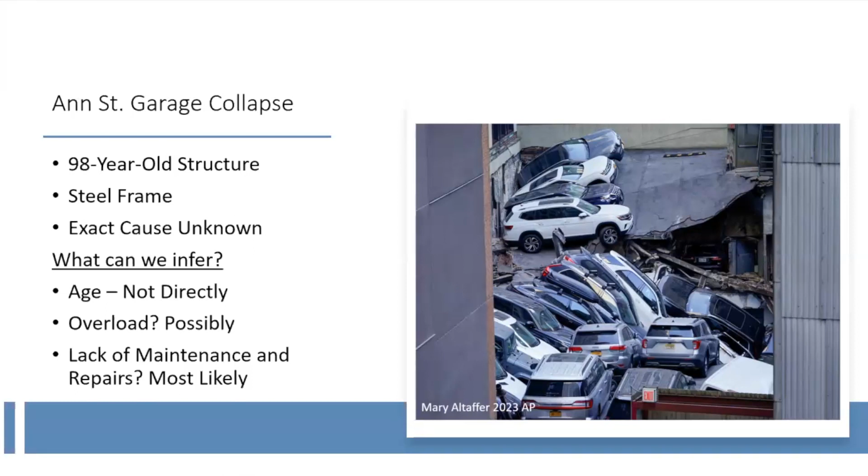Just some observations from the photos. You can see it was a steel building encased in concrete. Encased steel is difficult because the concrete hides corrosion, making it difficult to inspect. The roof also had an asphalt overlay and a buried membrane, which we'll talk more about.

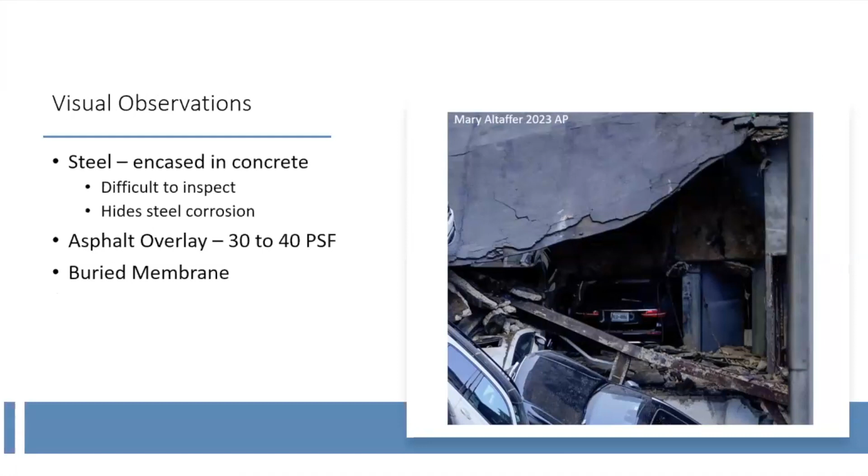In terms of what we do as structural engineers, you may have questions about what structural engineering is, but at the core, the job is basically to design the structure to support the load safely. There's one equation we use that's the basis of everything: the strength of the structure has to be greater than the load imposed. In terms of strength, there are a few things that go into it: the strength of materials, the design, and the quality of the construction.

On that side, there is variance in each of those things, so we use safety factors to account for them because we want the strength to well exceed the imposed load. For load, you basically have three factors: the dead load, which is the self-weight of the structure - all the steel, concrete, and things permanently affixed to the building; the live load, in this case vehicles; and the environment - wind, snow, etc.

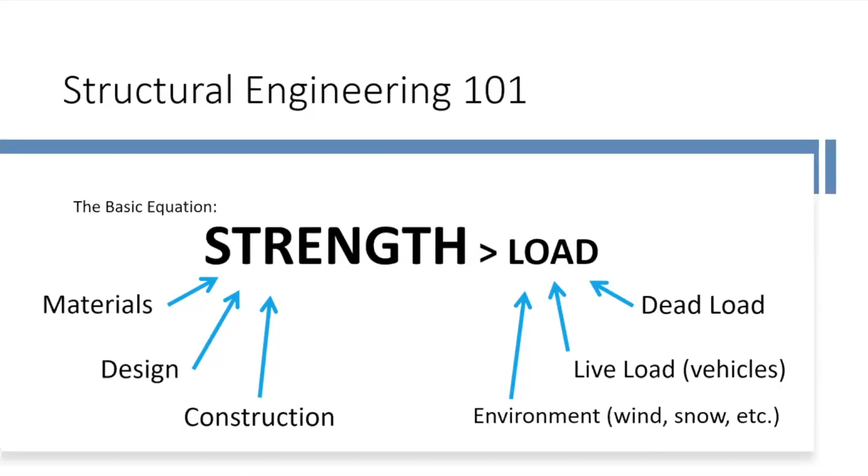So what reduces the strength of a structure? Number one, basically water. Water causes corrosion of steel - not just steel beams and girders, but the concrete slabs also have embedded steel bars called rebar. As water enters the concrete slab, that rebar can also corrode, which causes loss of strength and will also cause the concrete to spall, which we'll show you pictures of later.

What accelerates the process of corrosion is de-icing salts - the salt that the city or people spread on sidewalks and roads. Cars bring that in, along with snow and water, into the garage where it melts and infiltrates the concrete slabs. On top of that, our regular Northeast climate has a lot of freeze-thaw cycles, meaning the concrete freezes then thaws. Our Northeast climate is the worst because we have the most freeze-thaw cycles in any given year.

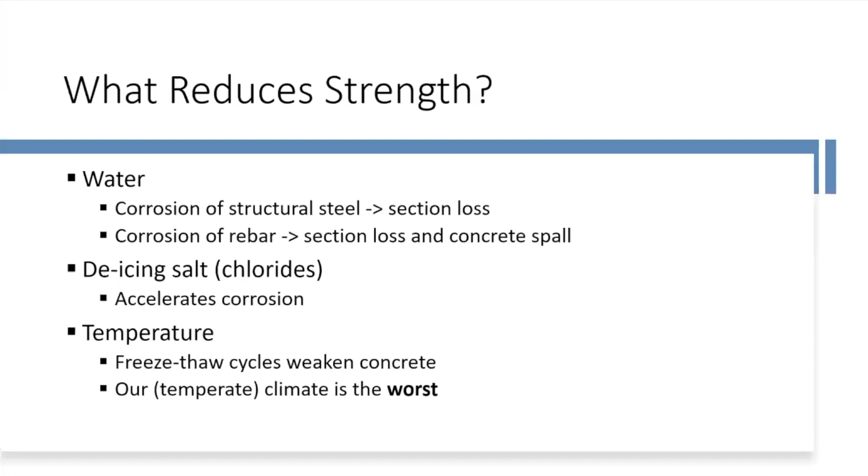Why are garages particularly at risk? Suchi will talk a little bit more about that. The big difference between garages and a building is that a building is weather tight and a garage is normally not. There are a lot of openings because sometimes these are open parking structures that bring the wind through to ensure there's enough ventilation. A lot of parking structures have windows that are broken, especially in New York City, which brings in water.

Not only that, most of the deterioration in a parking structure is related to water. Like Prabhu said, water is brought in by the vehicles that are parked there. It drops all the ice that comes with that vehicle, and it gets absorbed into the floor, causing corrosion.

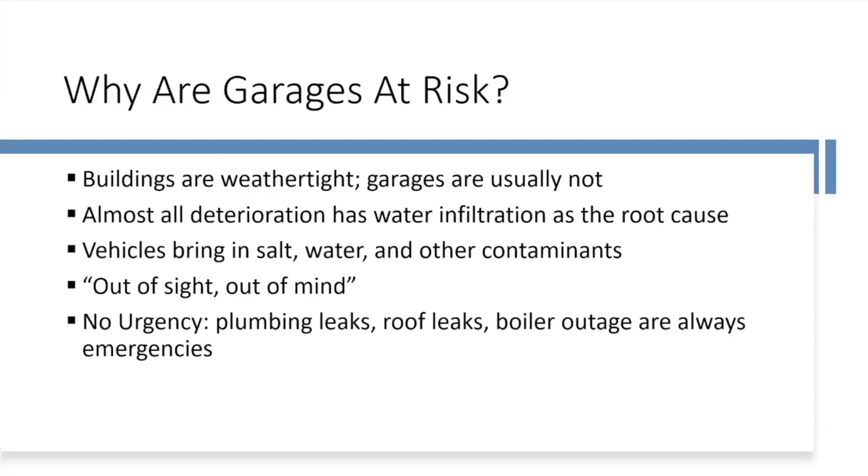So most people think out of sight, out of mind. People don't think about parking structures too much, and they don't maintain them very well. In a building, if you find a problem, you fix it right away - if water is dripping down to your room or office, they come and fix it. But in a parking garage, nobody really pays too much attention unless it becomes a big problem.

So we see a lot of steel corrosion. This Ann Street garage is a steel parking structure. If you can see some of the images, the top left one is where the column completely dropped, corroded and gave way, and the slab fell about 4 inches. On the other pictures, you can see corrosion of the beams that are really bad.

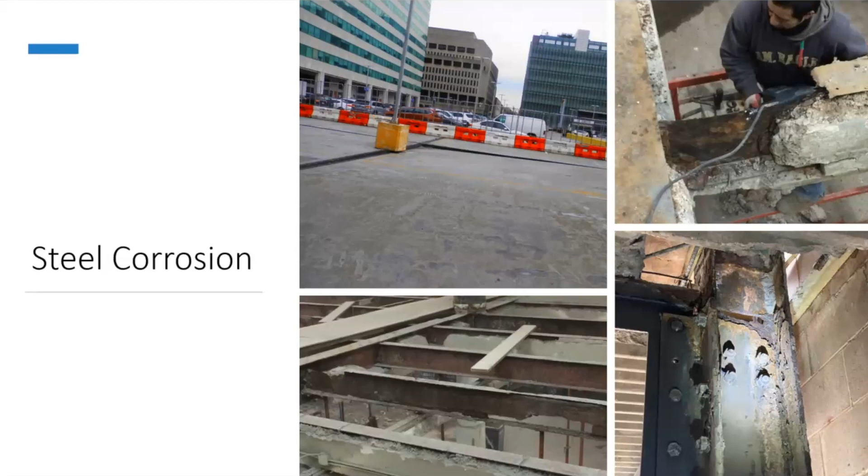And also concrete deterioration. On the top right-hand corner, you can see the soffit of the underside of the slab completely gone because of corrosion on the slab that has pushed the concrete out, and big holes. On the bottom left one, you can see a spall on the floor itself that's popping up. And on the bottom right hand, you can see a column that is damaged at the base and in other areas.

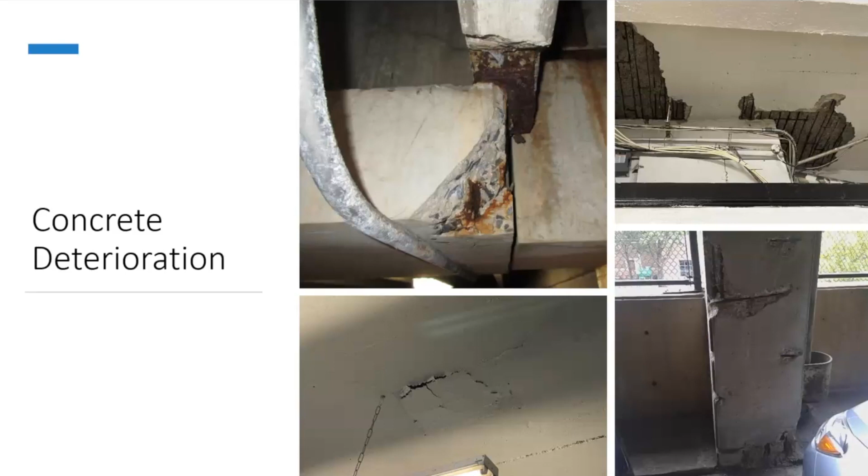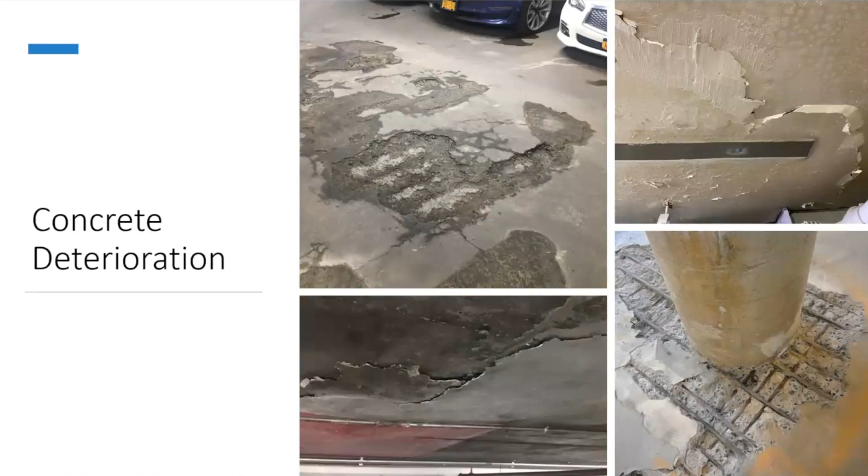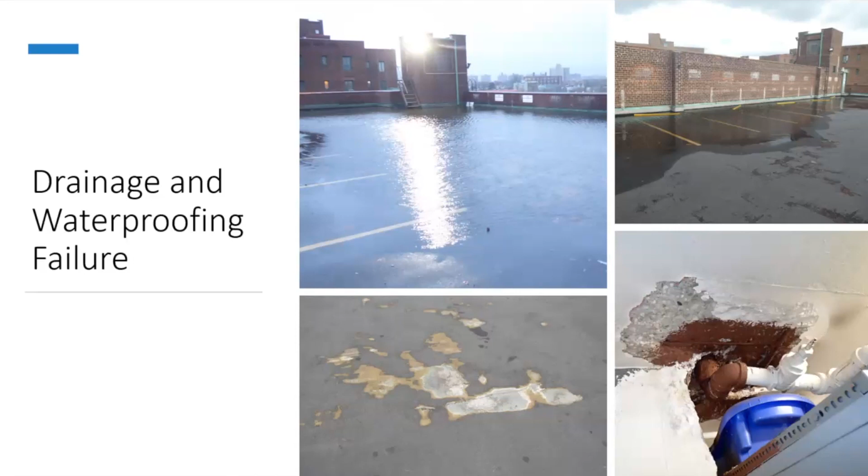Same thing. And then you see waterproofing failures. On the bottom, that's the membrane that has been plowed, and that renders the waterproofing membrane useless, and it lets the water go into the slab. That makes the corrosion rapidly increase. Same thing with the other one, where the drain has been leaking water, drain pipes, creating spalls in the concrete.

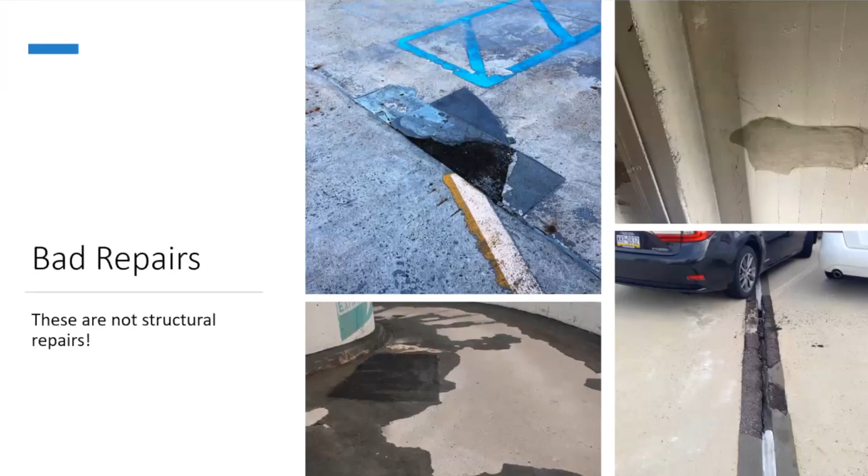So back to vehicle loading, because that was the big talking point in the news. Many stories were saying that the garage was overloaded. So let's talk about if this was true and what exactly is the risk of overloading your structure.

So everybody's probably noticed that cars have been getting bigger over the years, from sports cars to pickup trucks. Also, Americans are buying more trucks and SUVs than sedans. Last year, trucks and SUVs were over 80% of new car sales. And you may have noticed in garages that there are height limits posted, and there may be a height bar, but you probably have never seen a weight limit in a garage.

On top of that, you've noticed, obviously, more and more people are buying electric vehicles. And we talk about cost, range, charging, but we don't really talk about the weight of the vehicle. So because of the battery, even a mid-size SUV like a Tesla Model X actually weighs more than a full-size gas pickup like a Ford F-150.

And then the newest vehicles, like the Hummer EV, which just came out, actually weighs over 9,000 pounds empty. And with 4 people and luggage, will easily exceed 10,000 pounds. In terms of the code, the New York City code allows garages to have a capacity of 50 pounds per square foot. In some cases, you can reduce it to 40. As you can see, Hummer, this is based on its footprint plus 1 foot on either side, exceeds the code value. So is that an issue? Is that something we need to worry about?

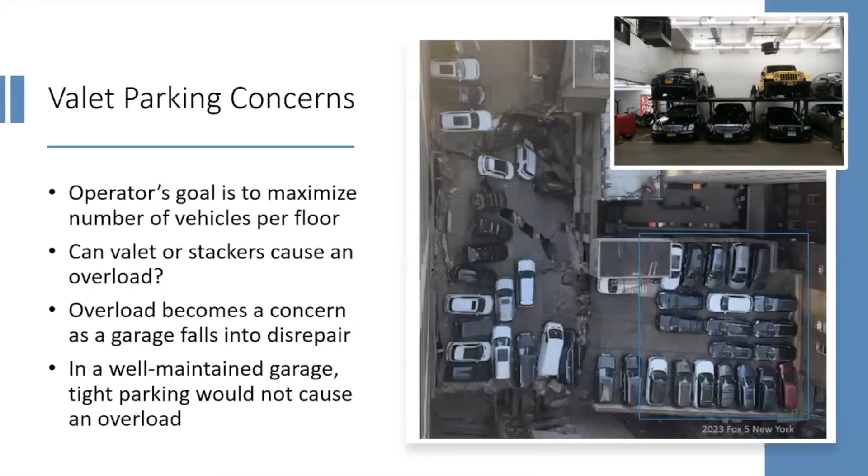So to reiterate, almost any type of passenger vehicle parking, even valet parking, pretty much cannot overload a properly maintained structure. EV weights, even though they're high, it's still not the biggest risk you face. If you have a lot of EV parking, it is definitely something to talk to an engineer about and understand what the structure can withstand. But the passenger vehicles are not the biggest loading risk.

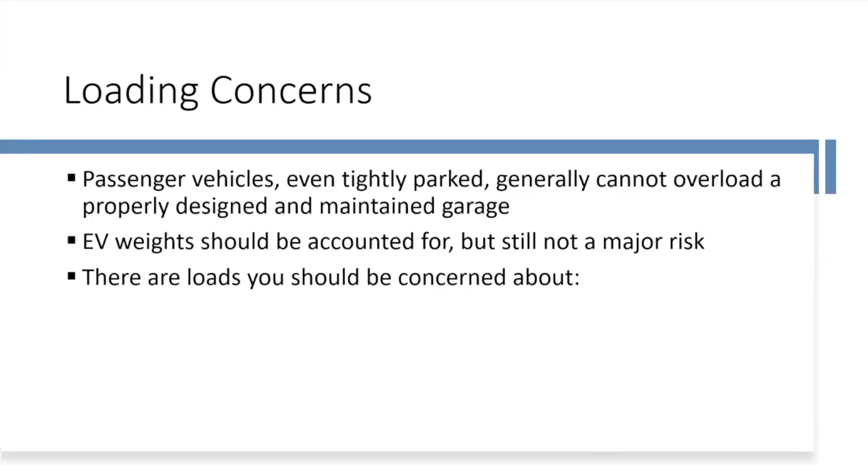There are loads we should be concerned about depending on how you use the garage. Number one, public assembly. Garages are not zoned for public assembly. So if you want to host an event on your garage roof, it really needs to be analyzed because the public assembly load is much higher.

Storage of materials, you've probably seen garages used as storage facilities. Things like pavers and concrete bags are very, very heavy and they cause a point load. Same with planters. A tree planter like this easily weighs 5,000 pounds and it's in a tiny, maybe 4 by 4 square foot area.

Construction vehicles: every single winter, especially in the outer boroughs and suburbs, there's at least one garage collapse, either from somebody piling snow or bringing an improper vehicle like a front end loader or a bulldozer onto a garage. And more day to day, if you have delivery vehicles, especially multi-axle vehicles, your garage really should be analyzed for those loads, and for fire trucks as well.

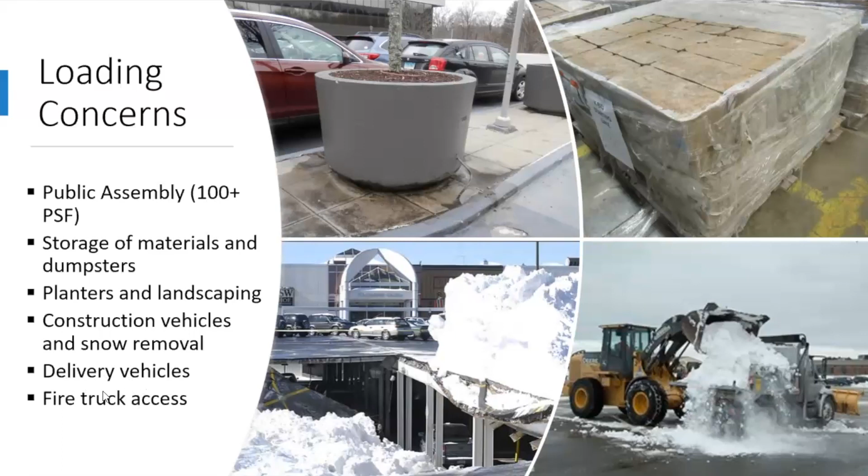So there is some good news. It's not all doom and gloom. The good news is that even under significant overload, well-maintained garages can usually resist the load, but if they do fail, they're actually designed to fail in a visible and gradual manner. Visible means you may have large cracks, the beams and columns may deflect visibly, but you should have time to evacuate and avoid any loss of life.

In the example Suchi talked about in this deck, you can see this column on the left pretty much exploded - there's nothing left of it. The deck settled 4 inches, but there were people here, there were cars driving on this, and everybody was able to evacuate. There were no injuries. Honestly, they almost didn't even notice this. It was actually some time after it happened when somebody noticed this happened.

Then there's the bad case. If the garage is already distressed, then even normal loading can cause an immediate failure - that's a failure without any warning. And then what happens is the failure of one distressed member causes the other distressed members next to it to fail. That's what leads to a catastrophic collapse like Ann Street.

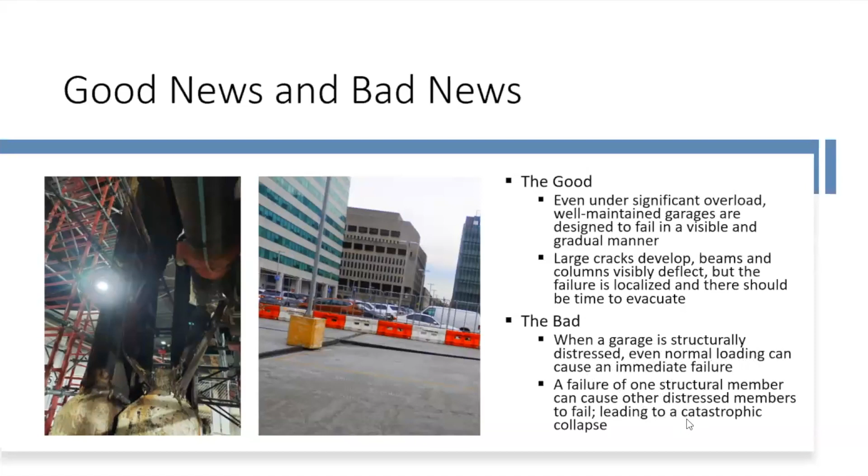So how did it get this bad? There's a lot of factors that go into that.

There are three groups looking at this: one is the owner or the board of the condo, residents and customers who are using it, and the operators. Each one has different roles.

The owners want to increase the property values, so they want to upgrade the lobbies, hallways, or landscaping, and to minimize fee increases. Residents just want to find the cheapest parking cost, needs to be fast, and don't damage my car. Operators want to increase the revenue.

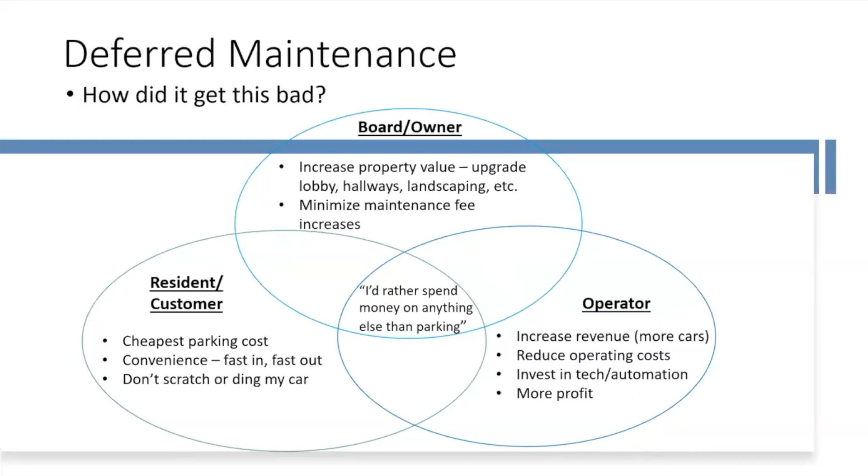So what they do is they stack the cars right next to each other. They want to reduce operating costs. They will invest in tech automation to get more profit, but nobody really looks at the garage itself and makes sure that it's safe. People want to spend money anywhere else other than on a parking garage.

I'm a board member of my own building, so I know this seems like a lot, but in reality any building requires maintenance. In my own building we have to check our boiler every year, check our elevators, fire alarm, fire sprinkler, and it's just part of our yearly process. So it may take some work up front, but the garage structure should also be part of your yearly maintenance checklist.

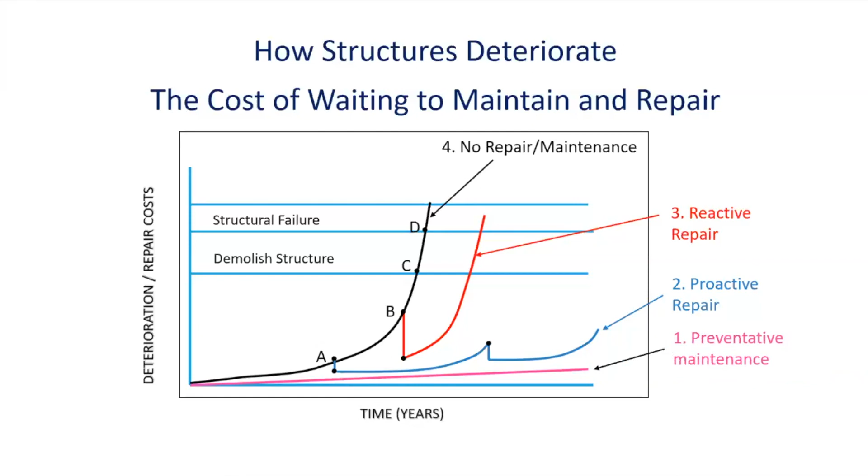Number one is the line you want to be on: doing yearly preventative maintenance and avoiding any major repair program. Annual maintenance reduces what we have to do later on.

We recommend a yearly walkthrough by an engineer to inspect the garage. We look at the waterproofing membrane, the drains, any other leaks, steel corrosion, potholes and trip hazards. One of the biggest issues in this kind of parking structure is spray-on fireproofing. If water leaks in there, it will hold that water and keep corroding the steel beam that is covered, and you wouldn't know it's damaged until a catastrophic failure. So you've got to keep an eye out for that.

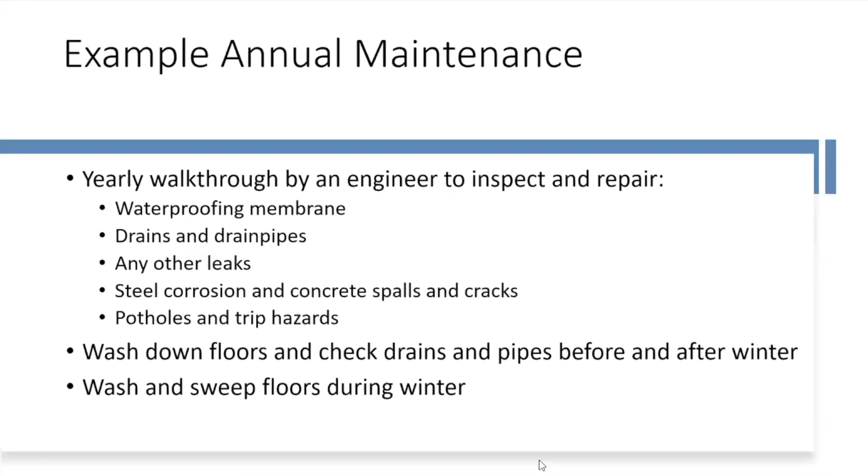You should wash down your floors every 6 months or so, right at the beginning of spring and fall, so that any salt brought in by the parking cars will go away and not get absorbed into the floor.

So with waterproofing, there are higher cost and lower cost options. Weatherproofing the building envelope is very expensive - you need to completely enclose it and provide ventilation. To get the water out, you can slope the floors much more easily; a 2% pitch is very easy to attain, but it's a lot more expensive.

Installing a traffic-bearing waterproofing membrane in all areas, especially at the entrances, ramps, and lower floors, becomes a priority because those areas are used excessively. This will stop water from being absorbed into the concrete and creating problems. You can also install floor drains in ponding locations. You should check drains and pipes for clogging immediately, because that will stop any water from getting into your structure and corroding it.

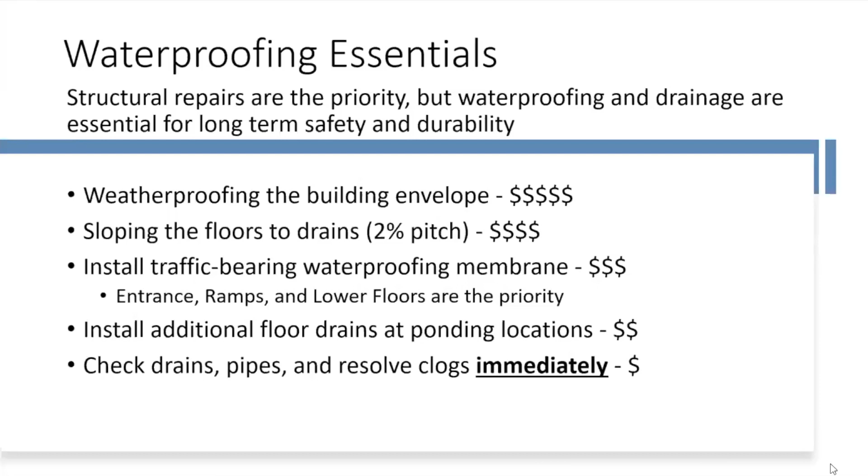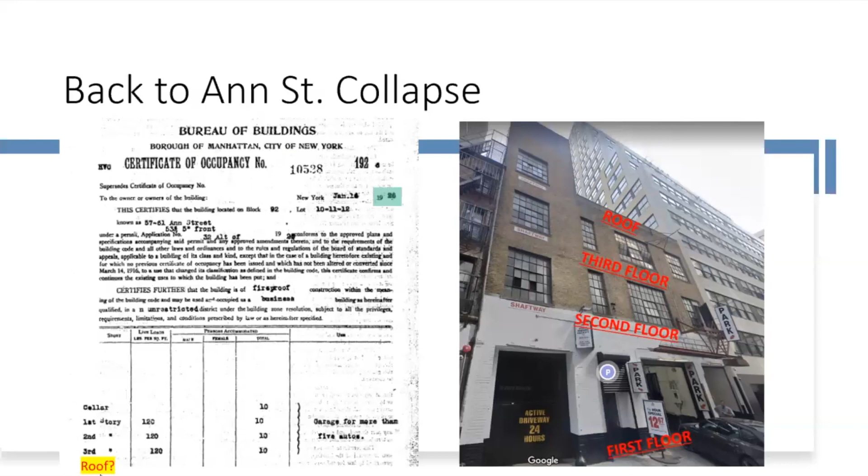So going back to Ann Street, based on everything we talked about, what can we conclude? One thing I noticed when I checked the certificate of occupancy was that when it was built in 1926, the roof was not permitted for parking. I also went through the DOB permit history to see how many repairs were done on this building.

In the known history, even though it's a 100-year-old structure, the only permitted repair program was in 2010 for concrete and facade repairs, and it only cost $40,000, which is not a lot for a garage this size and age. It's possible they had other repair work done that was not permitted, and I'm sure the DOB is investigating that and trying to find the full history of this garage.

Also, if you notice, the work on floors 1 through 3 - the roof, which is what collapsed, was not even part of this work. So it really seems, according to public data, that this garage did not have sufficient maintenance.

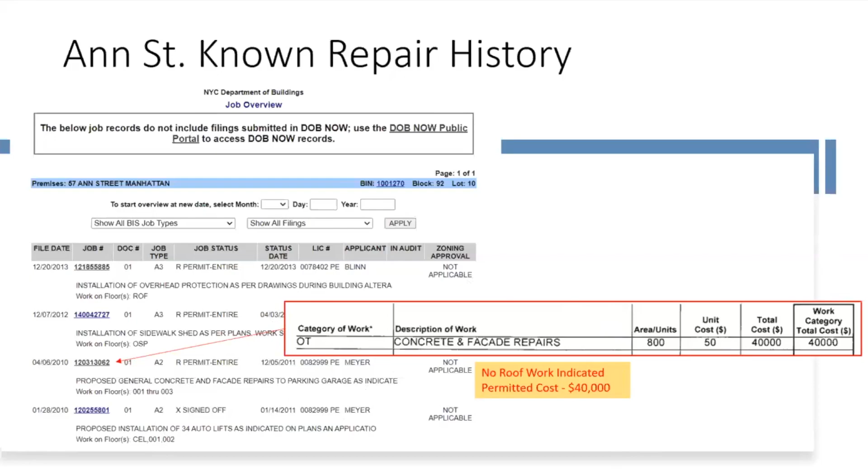So based on all that, what do we conclude? We can find that the roof parking was added in 1957, rated at 75 PSF, which is actually higher than the current code. If you remember the Hummer example, the Hummer EV at 59 PSF - even if you valet park those side by side, end to end throughout the whole roof, it would not exceed 75 pounds per square foot. So heavier vehicles and valet parking were not the contributors to this collapse. Our conclusion is that lack of maintenance, especially on the roof, was the most significant factor.

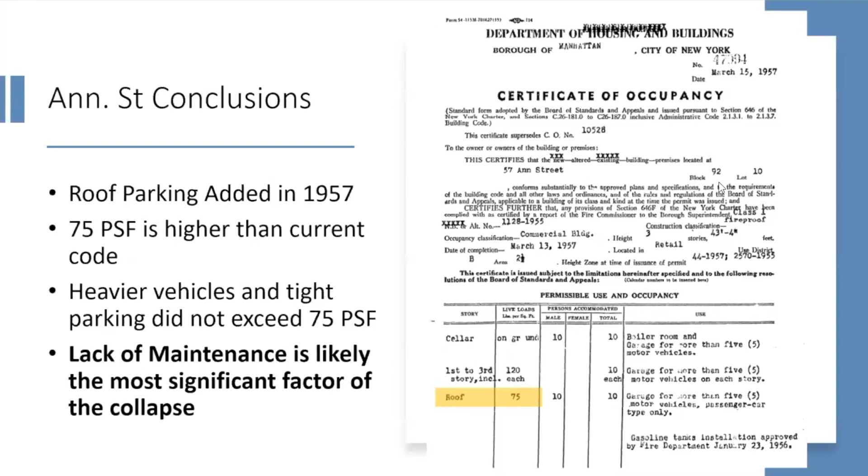And this leads to local law 126. If you've ever gone through local law 11, it's pretty much exactly the same, even the same language. Basically, it applies to parking structures with more than 3 vehicles, whether they're self-standing or part of a building.

A DOB certified qualified parking structure inspector performs inspection every 6 years. You can file the report as safe, meaning no repairs are required until the next cycle. Or safe with repairs and engineering monitoring, meaning some repairs are required before the next report is filed.

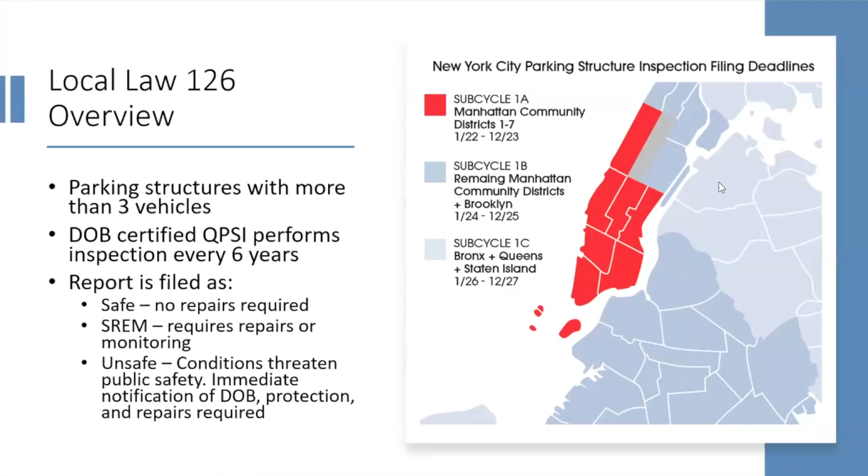Or unsafe. Unsafe means you have conditions that immediately threaten public safety, so you have to do 3 things. First, the DOB actually requires you to notify them, that's in the law. Number 2, you have to provide protection of that area or close that area. And you have to begin repairs right away, and complete the repairs within 90 days or file for an extension. But realistically, you have to start the repair program immediately.

Closing thoughts. So, following up on the garage inspection, if you hire an engineer, will they guarantee your structure is safe? The simple answer is no. There are too many unknowns. The garages are old, we don't have original documents, we don't have original calculations. So it's impossible for an engineer to come in and tell you your garage is absolutely safe.

So then you're asking, what can I do? Number one, if your garage has been standing for years or decades, we have to assume that it was designed and built correctly. That means your responsibility should be to maintain the structure in as close to its original condition as possible, because then you at least know that you're supporting the loads that you're imposing on it every day.

Make garage inspection maintenance a yearly task, just like your other building systems. Then start budgeting in your reserves for structural and waterproofing repairs. Usually, in addition to the yearly work, you probably have to do some kind of program every 5 years. A budget is about $3 to $5 per square foot a year. That depends on the age and existing condition, but that's a baseline number. When you have an engineer come in, they will give you a more accurate number to work towards.

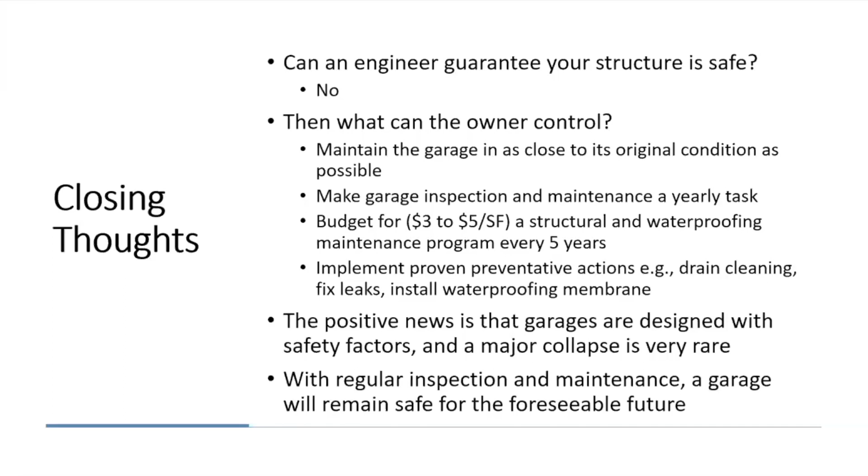All right, thanks everybody, and we're ready to take any questions.

Thank you so much for that, that was really helpful. I know Terry and I have a few questions we wanted to kick off with, and I see some of the questions coming in, so we'll give folks a couple more minutes to share any of them. But I know, Terry, you had a question around freestanding garages versus co-op ones. Do you want to kick off with that?

Right. So when you're a co-op or condo with a garage, they're usually underground. Are underground garages more protected from this kind of damage? They are in some ways, because obviously the building is on top of them. So you would expect, if the building is weather tight, the garage is also. But in reality, underground garages have their own issues because they're underground.

Obviously, water seeks the lowest level, so cars bring in water, water comes down the ramp when it rains and snows. Also, when you're underground, you have groundwater issues. Pretty much every underground garage we've seen has some kind of water coming in through the walls or floors. So it's hard to say. A self-standing open garage probably is more susceptible to deterioration. On the other hand, an underground garage with a building on top of it, even if it's less susceptible, the risk is much bigger, because you have so many more occupants who are at risk.